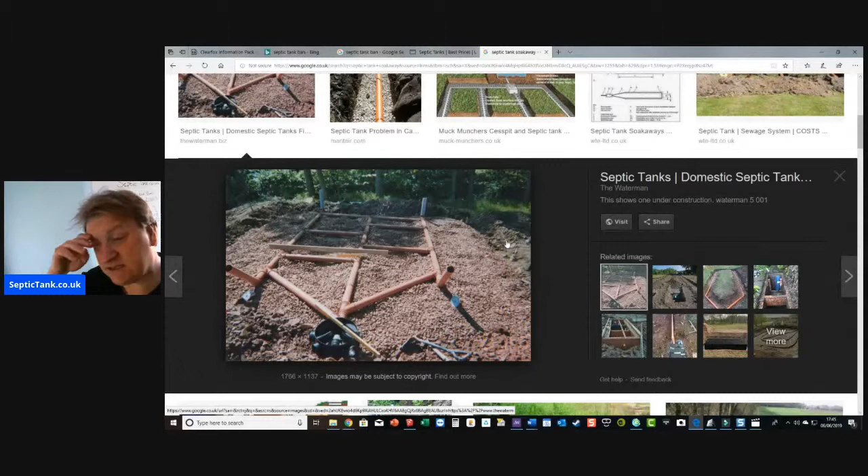So I'm going to go on here and type on Google. There we go. And I'm just going to type in septic tank soakaway. So I'm just going to show you the different types of septic tanks and soakaways on the market today. All right, so let's have a look at one. Here's one. Here's a typical septic tank and soakaway. I call it typical because they're traditional. Tons and tons of shingle, lots of orange pipes.

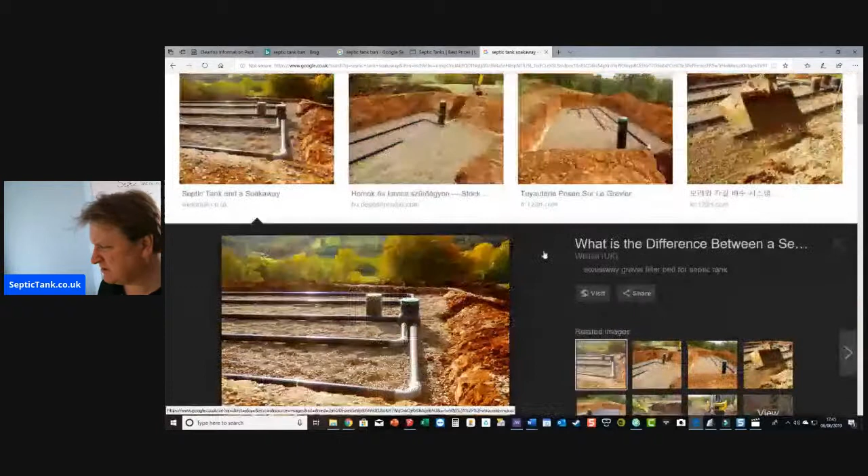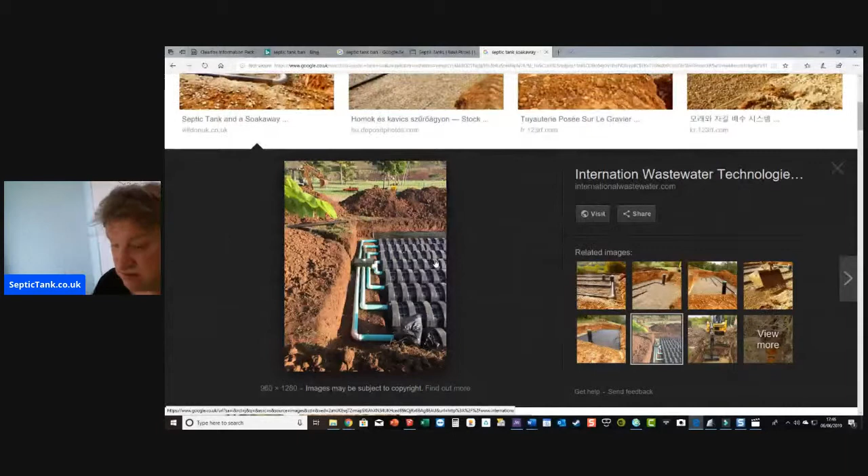Let's give you another one. Let's have a look what else is on here. So again, I don't know who this company is, but you can see tons of pipes there, tons of shingle, tons of excavation. Oh man, here's another one there. All right, here's like a soakaway pit. Can you see they're digging a big pit? It's full of water. What else have we got? There's the same one from a different angle. As I said, it's got like 4 runs of pipes, tons and tons of shingle.

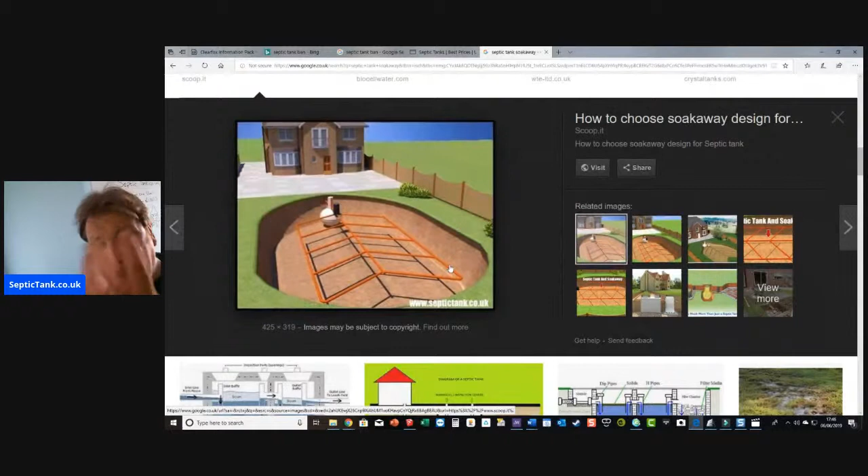Let's see what else we've got here. Now, here's another one. There's one of my pictures. Again, a herringbone type soakaway system.

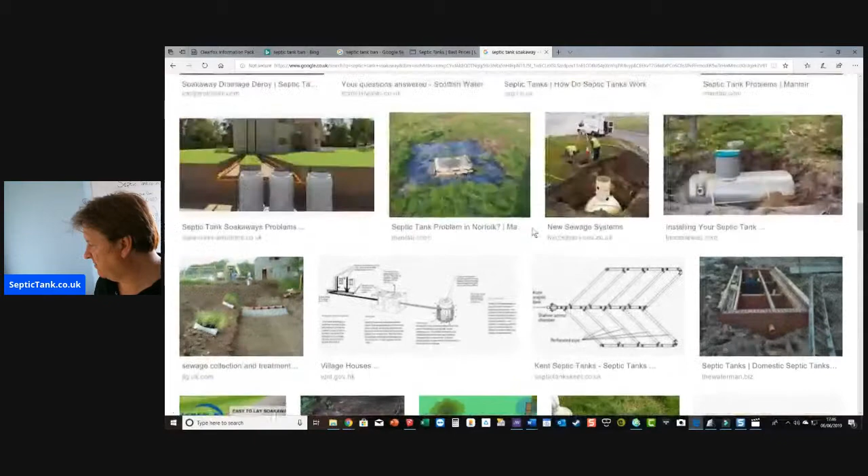What else have we got here? Who's that guy? What's going on there? But anyway, I digress.

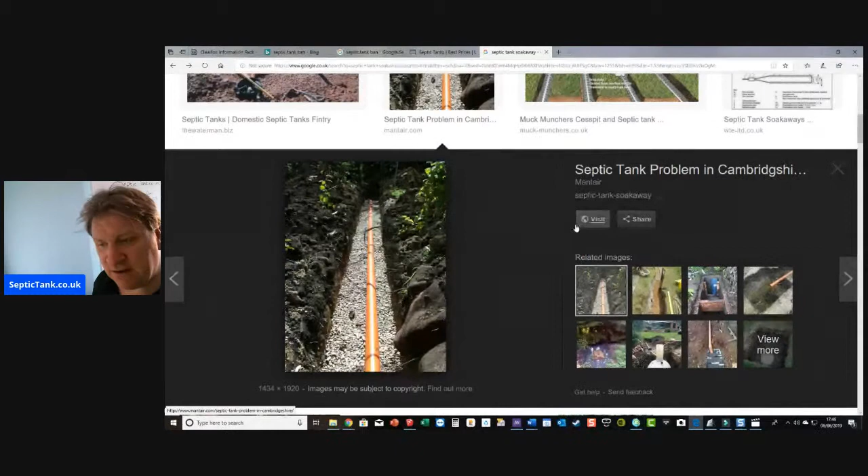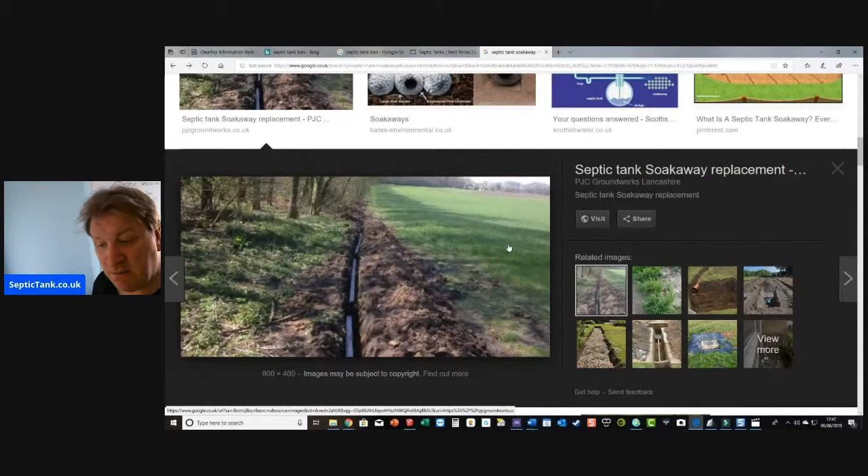So I'm just giving you a broad view. All right, here's another way. Obviously, some pipes, big long spine of orange pipes and shingle there. What else have we got? Man alive. There's another one there. A massive, massive spine going a long, long way. All right, so that one's going into a soakaway pit. But look, you get the point. There's tons of different septic tank and soakaway ideas out there.

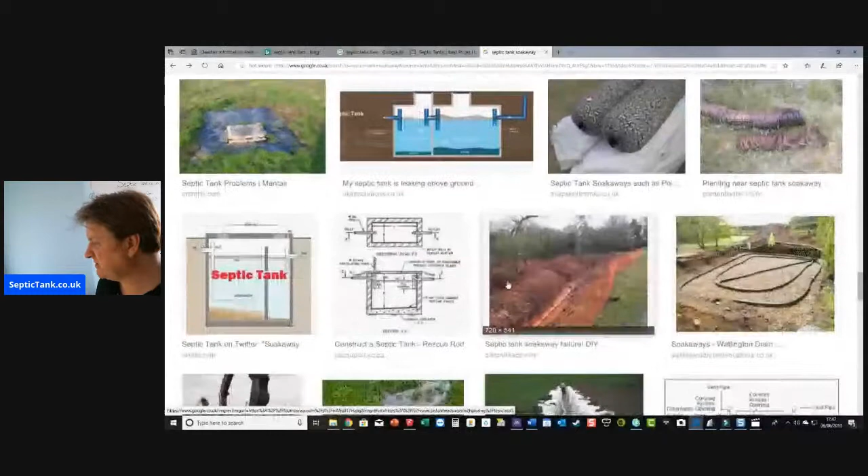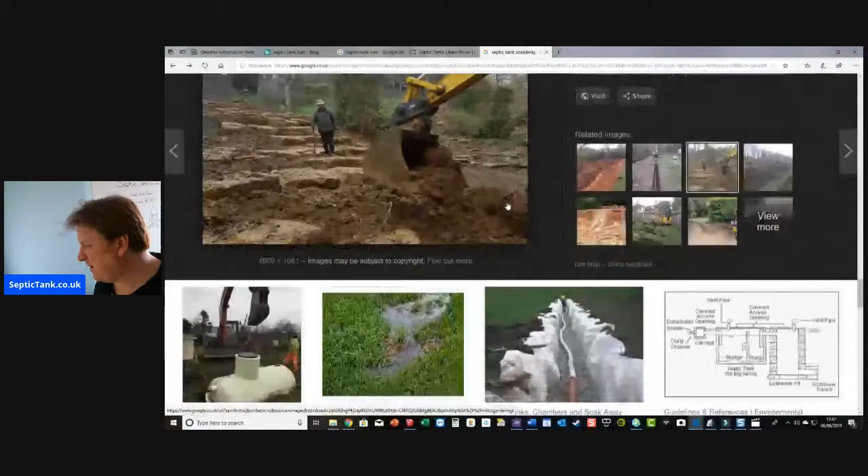You go to loads of different sites. I mean, here's another one, septic tank soakaway failure. Look at the size and the depth of the holes that they've had to dig up here. There's another one. Flipping heck, it's just nuts, man. Just absolutely crazy. A lot of these soakaway designs, soakaway construction, whatever you want to call it.

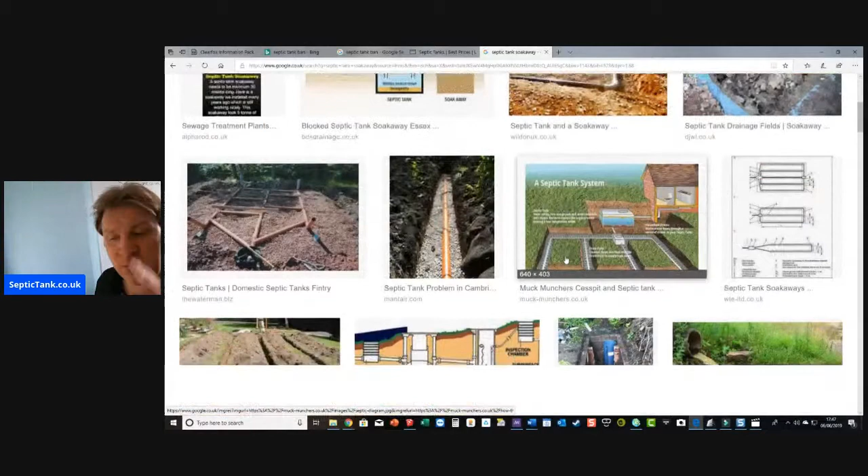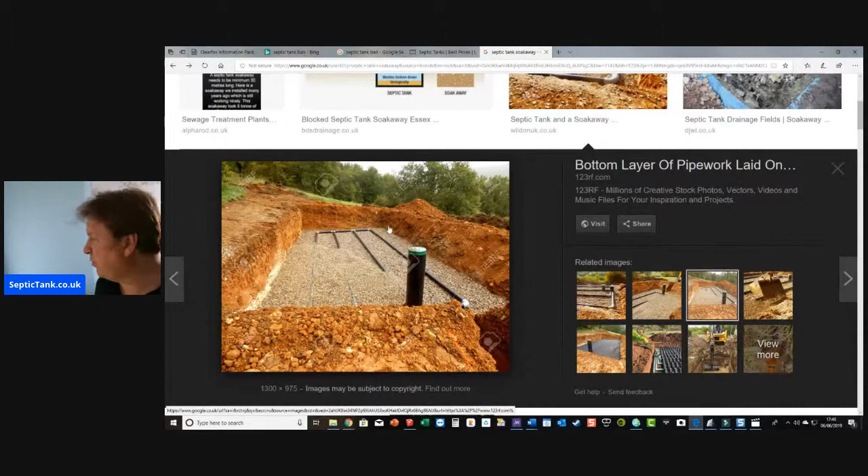But I'm going to show you a really simple and easy way to make and create a septic tank and soakaway that isn't going to cost you thousands and thousands of pounds, right? I'm going to show you a nice, legal, simple way to create your own septic tank and soakaway without having to spend thousands of pounds on shingle and pipes and whatnot. So let me get straight into this, okay?

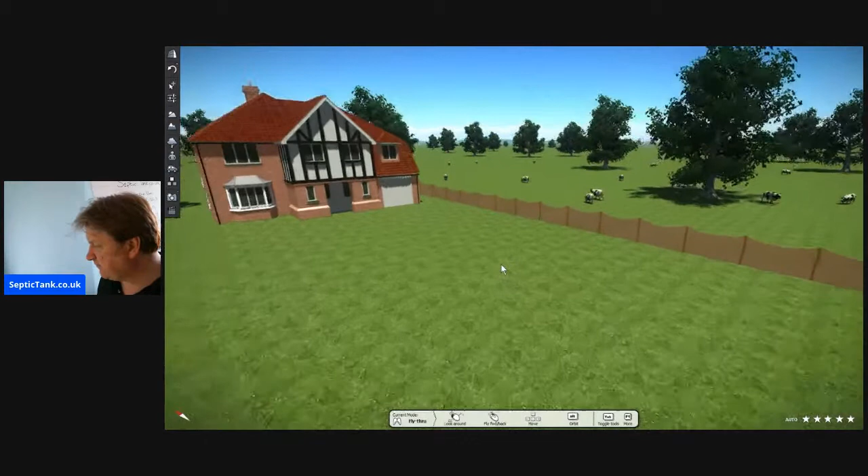So here's a typical house. Let's say this is your property and you've just bought it, and you want to put your own septic tank and soakaway in. Maybe you want to replace the septic tank and soakaway. Let me show you how easy it is to do, and this will save you a lot of money. So the first thing you need to do is locate your soil pipe. Now, most soil pipes are by the side of the house, at the back of the house.

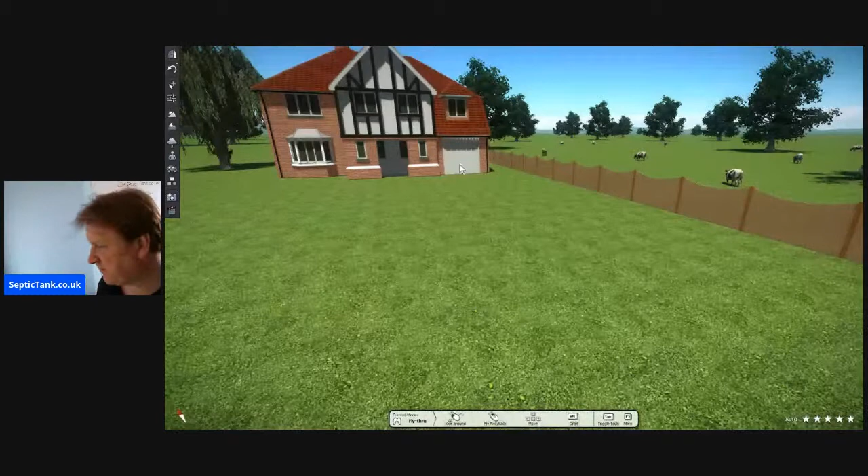But for this instance, for this illustration, let's pretend the soil pipe is at the front of the house. Now, a soil pipe basically is where all the waste goes down and leaves your property. All right. So the first thing we would do is dig a trench. That's pretty simple, isn't it? So we dig a trench from the house where the soil pipe is, just a standard trench.

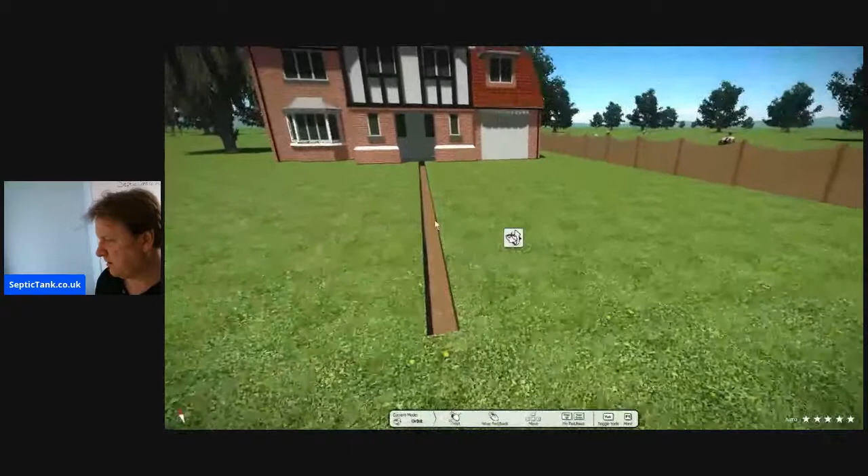Okay. Then, and I really mean this, this is how easy it is. And what I'm going to show you is going to blow your mind. The next thing you need to do is dig a little hole. So you've got your trench from your house and you literally dig a very, very small hole. And this hole here is for the septic tank. Now, notice how shallow it is. You'll get where I'm going with this.

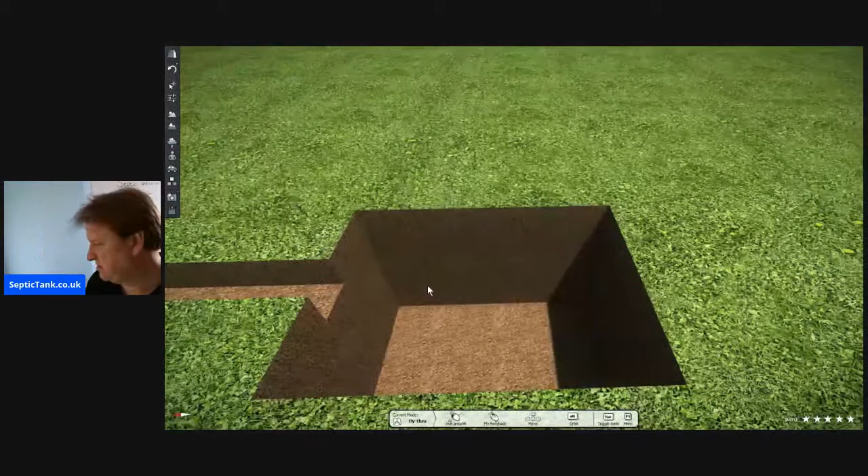So straight away, this has taken you an hour to do so far, okay? It's taken you about an hour to do. Just dig a small little trench and a hole for the septic tank. Then what you do is this.

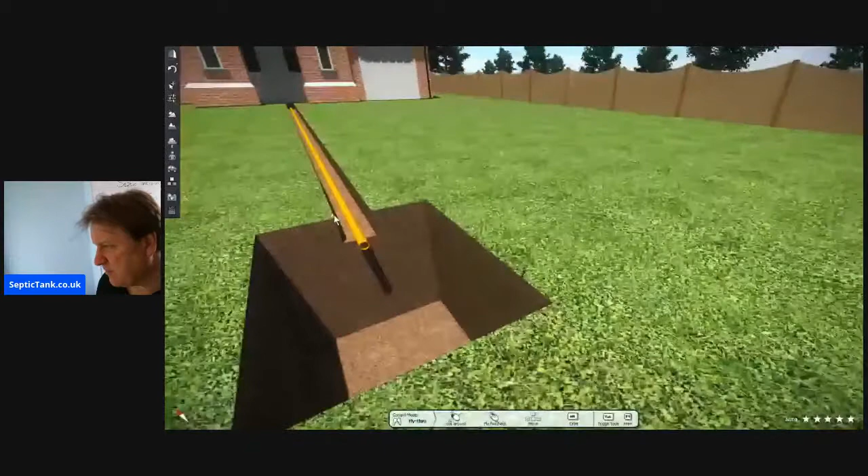You get a standard 4-inch pipe that connects to your soil pipe, and all the waste from your property is going to come down this soil pipe, waste from the kitchen, from the dishwasher, from the washing machine, from the showers, from upstairs, bidets, sinks, baths, everything comes down this pipe, okay? So it travels down that pipe, and then in this hole here, you're going to put your shallow dig septic tank.

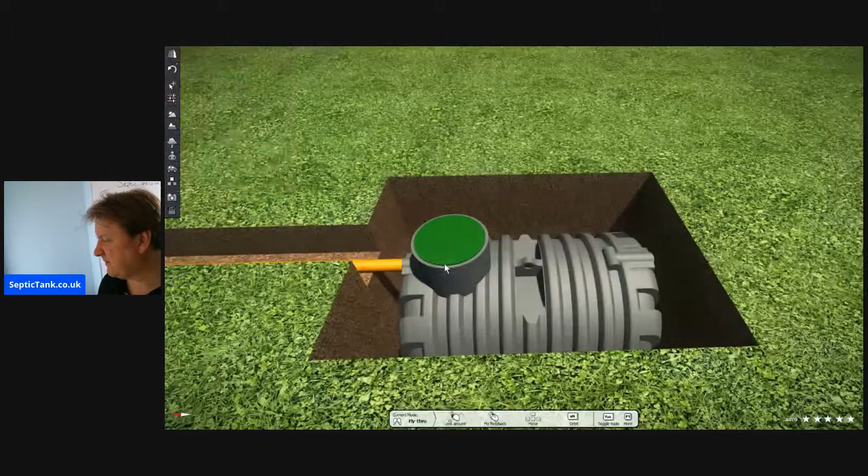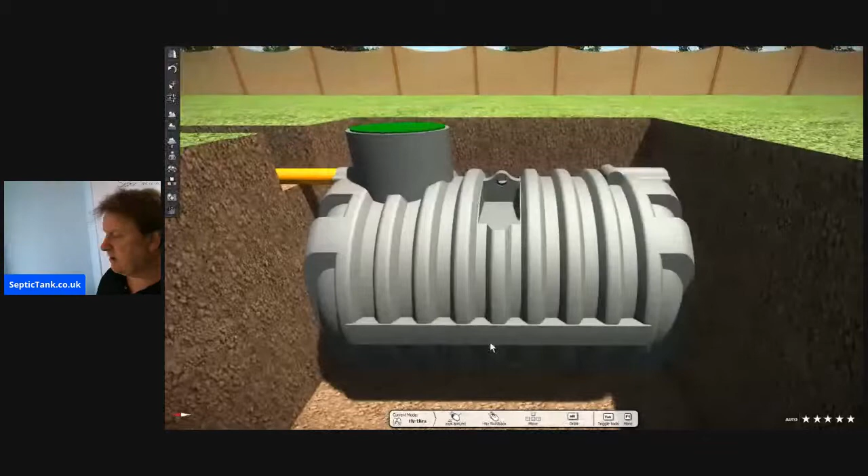So let me just put that in. There you go. There's your septic tank. If I just do a cutaway section here, let me show you this with a bit more clarity. So straight away, that's called a low profile shallow dig septic tank. They're called such because they're very shallow. They don't need concreting. And they literally take about 40 minutes to get in.

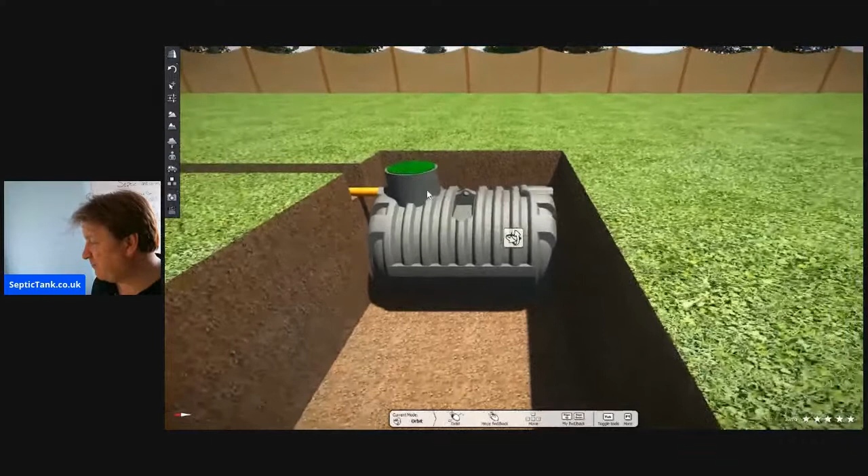So can you see what I've done now? I'll just reiterate. We've dug a trench from there and we've connected the pipe to the septic tank. Now, this is where it gets really simple from here on, because the next thing we need to do now is dig. Oh, we don't want that yet. No, we want...

Oh, my brain is not working today. My brain is not working today. All right, there we go. I got there. It's been a very long day today.

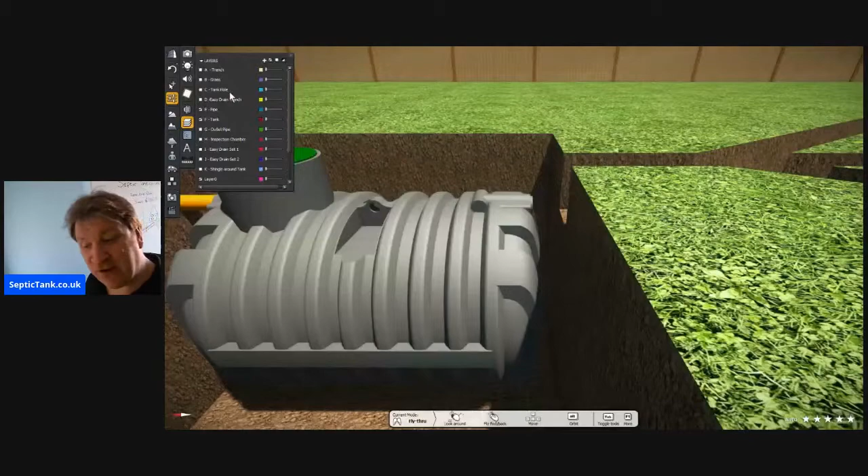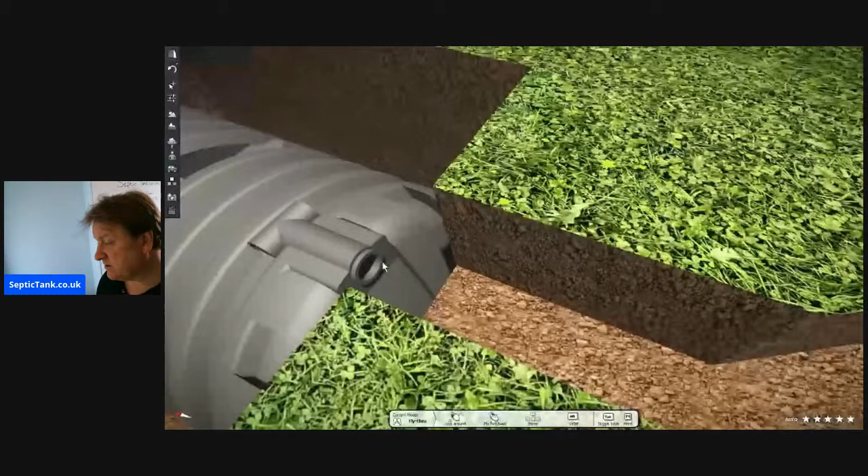Okay. The next thing we need to do is just dig another little trench. Now, you notice that's the outlet pipe on the septic tank there. So all the waste goes in, the tank fills up with liquid, and it's going to come out of this hole here. So all that you do is put a little pipe coming out from the septic tank. Let me show you what it looks like. Just put the grass back on there. There you go. So that's what it looks like.

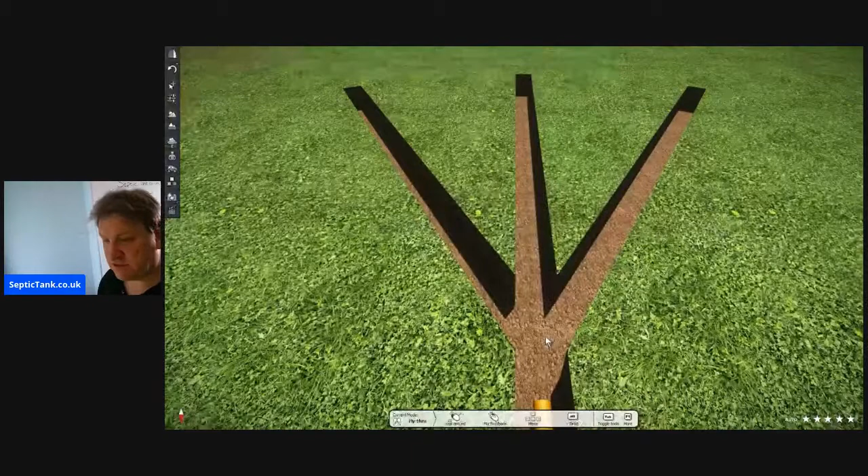So you've got your pipe coming into your tank and you've got your pipe coming out from the tank. That's pretty straightforward so far, isn't it? So let me just zoom this around now for you. And you'll notice here, we've dug 3 little trenches. Just 3 little trenches. If I go a bit higher for you, it almost looks like a duck's foot or a chicken's foot, doesn't it? But this is where it gets amazing, okay?

And this is like space age technology that is available to buy now. And so all that you need to do, once you've done that, is put a German inspection chamber on the outlet pipe. Okay, look at that. So if we go back here, that's the outlet pipe of the septic tank. All the liquid is going to come down here. And this basically is like a distribution chamber. You can see 3 outlets on there, right?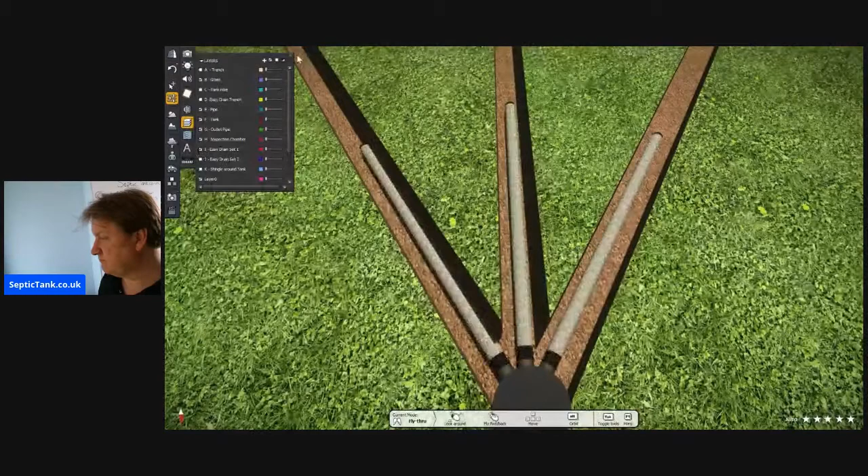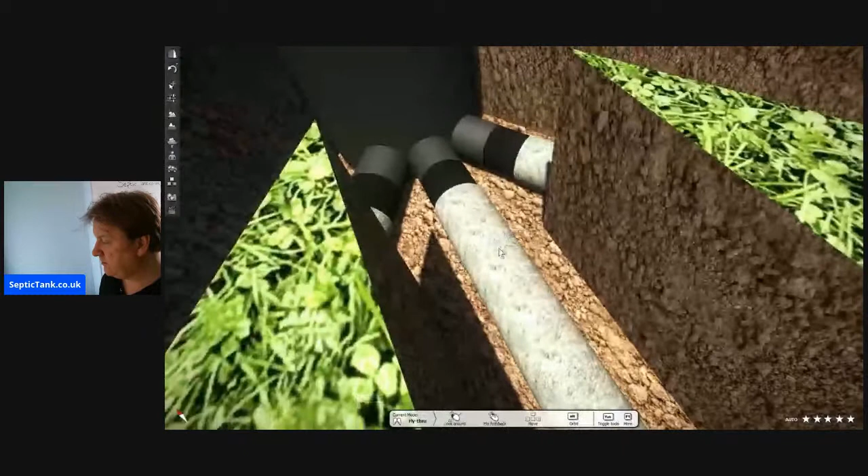All right, they're like fingers. Each finger is about 3 feet in length, and they literally just slot into the outlet pipe on your septic tank there. So let me just turn the brightness down on there a bit. Okay, that was a bit too bright because the sun is shining there. All right, so that's what they look like.

Okay, so there's 3 fingers. Each finger slots into those 3 outlet pipes, and that's what they are. They're gravel-free soakaway pipes. So once you've put the first 3 fingers in, the next thing that you do is put the next set of fingers in. And that is basically it. So let me show you this, right?

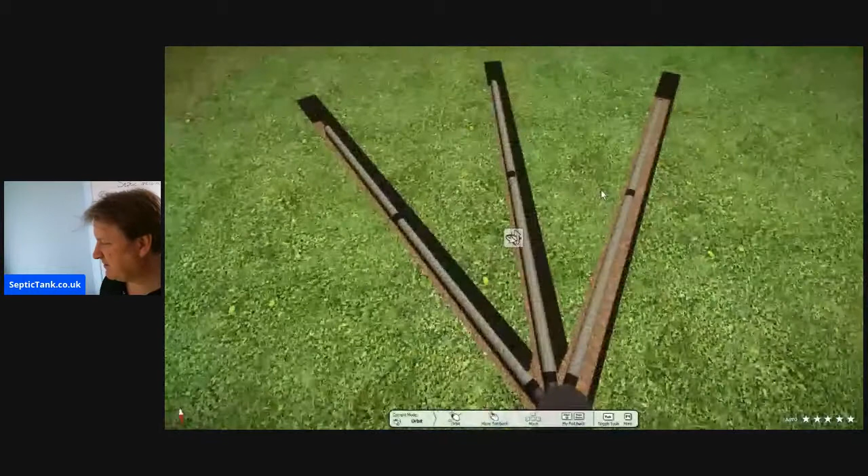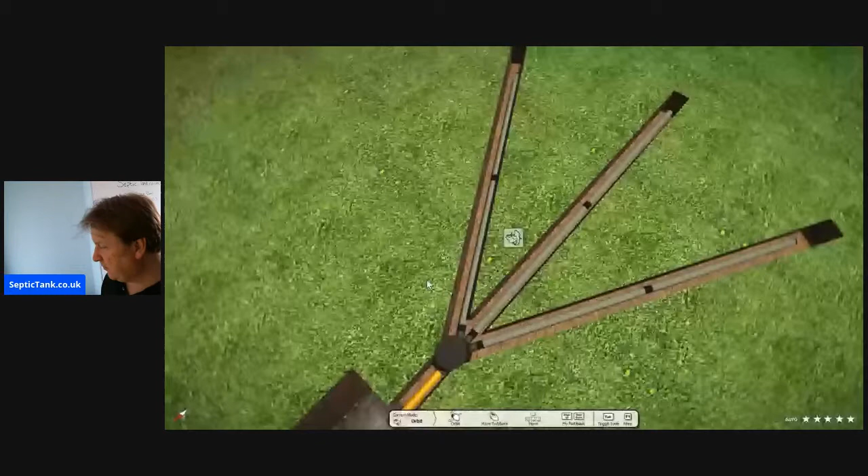I'm showing you these new septic tank soakaway products because they're just revolutionary and they're taking the United Kingdom by storm. This is called Easy Drain Soakaway Kit. So let me just give you a bird's eye view now of what we've done here. So this has taken in all about 3 hours to install an entire septic tank soakaway system. It's unheard of. That's how amazing the new technology is, right?

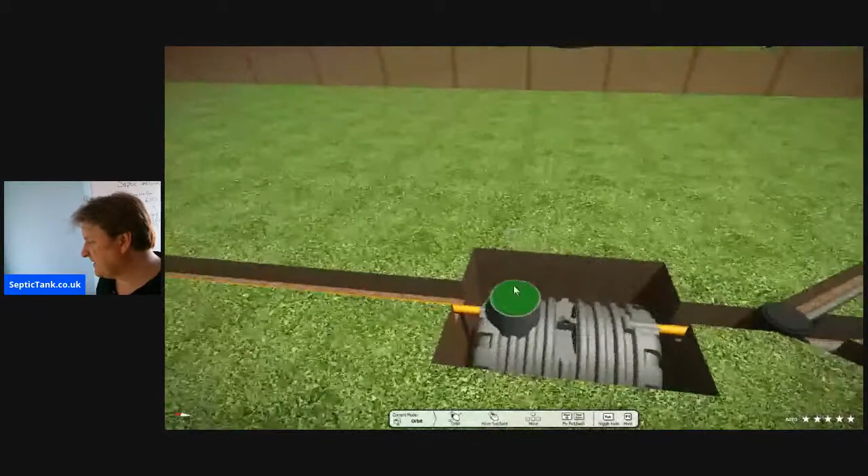So let's just recap what we've done here. If you've never put a septic tank in before, or if you want to get your builder to do it, then he'll love doing this. So let's recap. You dig a trench, you put your pipe in. You put your septic tank in. You put a little orange pipe on the outlet of the septic tank. You put the inspection chamber in, and then you just put your fingers of Easy Drain on there.

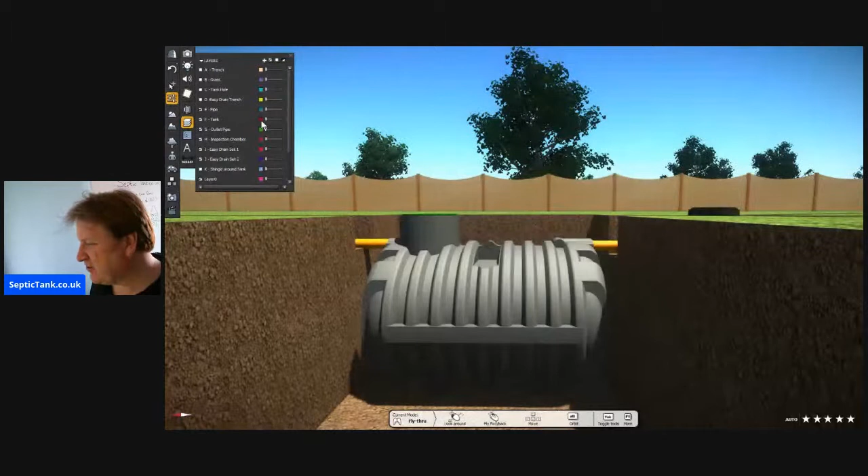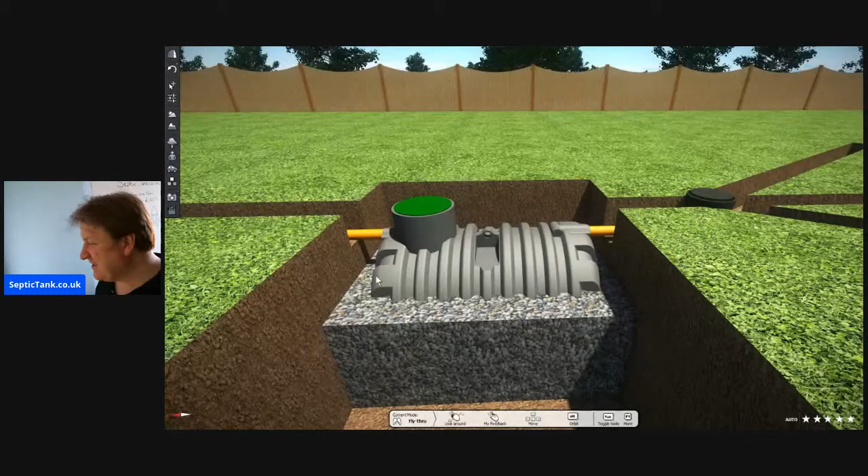All right. And so once you've done that, what do you do then? Well, this is the bit now on the home straight. So let me just take this bit of grass away here. Remember we got our low profile tank. Because they're low profile, they don't need any concreting. So you literally just put some shingle around it like so. Look at that. Ba-da! And then it just gets easier from here.

If you've never put a septic tank in and you fancy getting a digger and doing it yourself, you'll love it. I really tell you, it's so easy to put in; these tanks are unbelievable. So once you've done that, you put the soil over the tank like so. Okay, that's easy, isn't it?

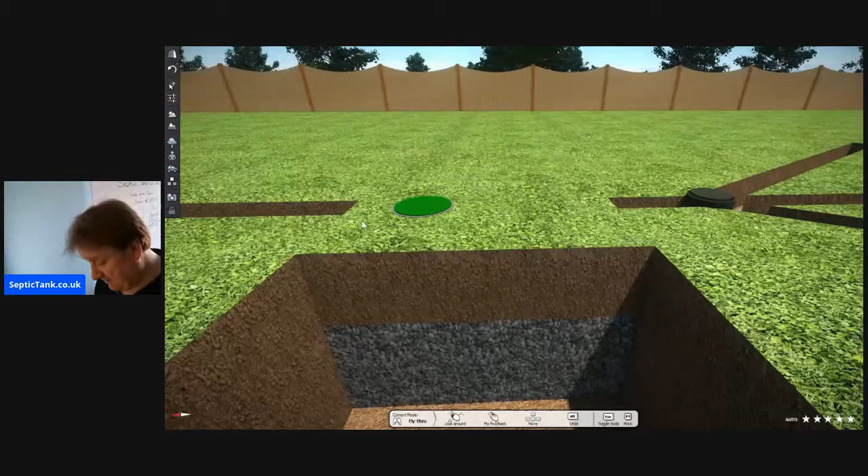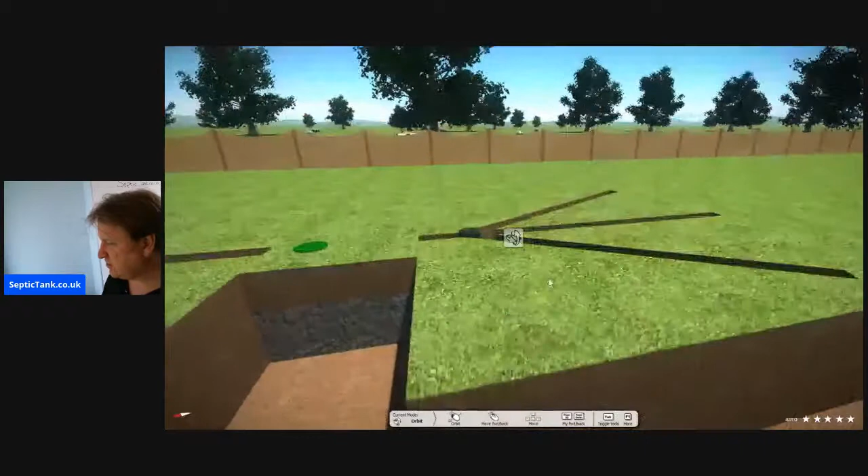What's hard about that? Now going back to the Easy Drain, because it's gravel free... If you're wondering what this hole is here, that was just the cutaway section, so I could show you what it looks like. So don't worry about that. If I put the grass back on, there you go. That's how it looks. So this is how it looks from an aerial view. All right, so you've put the soil over the tank.

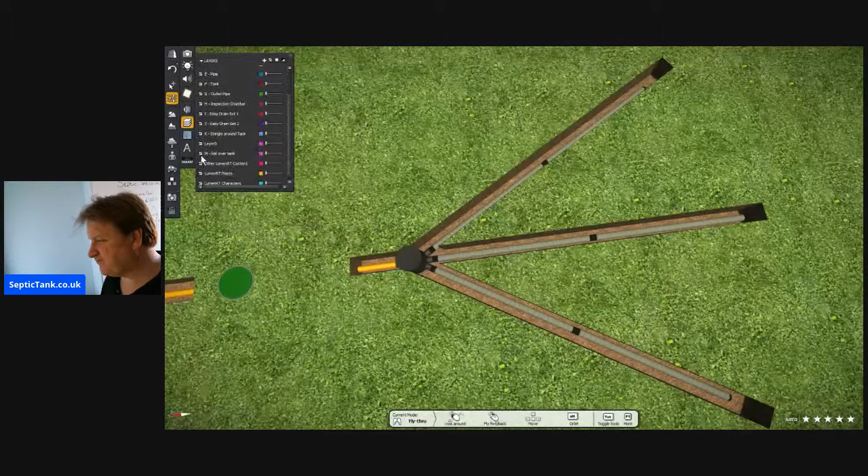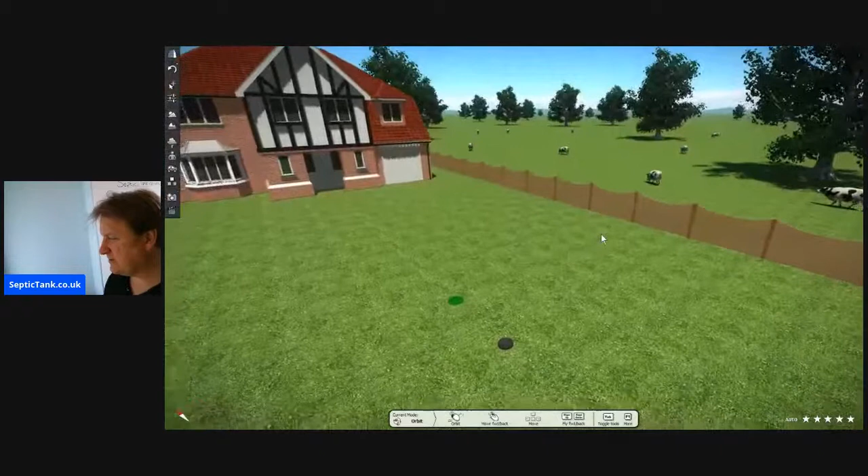What now? Well, you just fill the trenches with the Easy Drain with soil too. Let me show you this. Where is it? There you go. Da-da! You can seed it, you can turf it, just put the turf back. And last but not least, all you do is fill the trench in. And that's how it will look. So you won't even notice it, right? So if I just come out a bit now, that is how to install a modern septic tank and soakaway.

So now you're asking about cost. Well, let me give you the costing here. To put an onion shaped septic tank in, let me just show you what I mean by that. I'm just going back to Google because I'm going to show you a 2,800 litre septic tank. So this is what I mean by an onion tank. Something like that, these big, massive, bulbous tank things. You need a flipping JCB to lift them, but let me just show you what I mean.

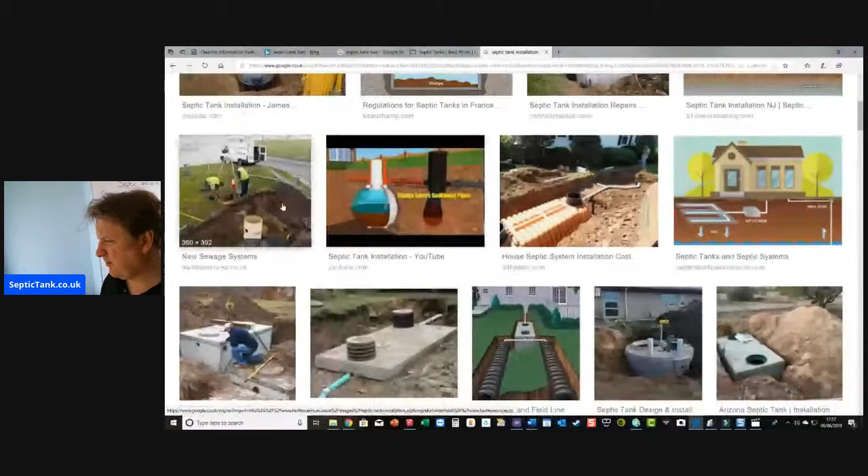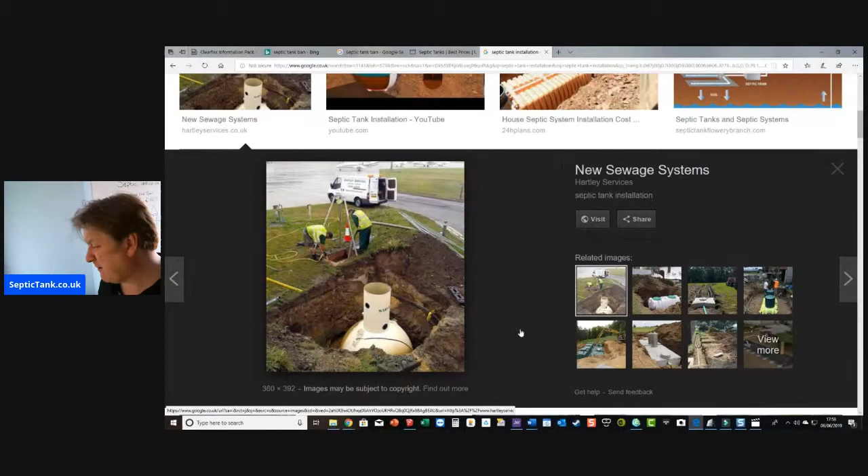So let's see if we can find septic tank installation here. Let me just put that in, just so I can show you. Oh, here's one. Look at the size of the hole. It's nuts why people still put these flaming tanks in, but look at the size of the hole. There's a guy there. These holes are about 12, 13 foot deep. The low profile tanks I was just showing you, they're like 3.5, 4 foot deep. So they're like 10 feet shallower.

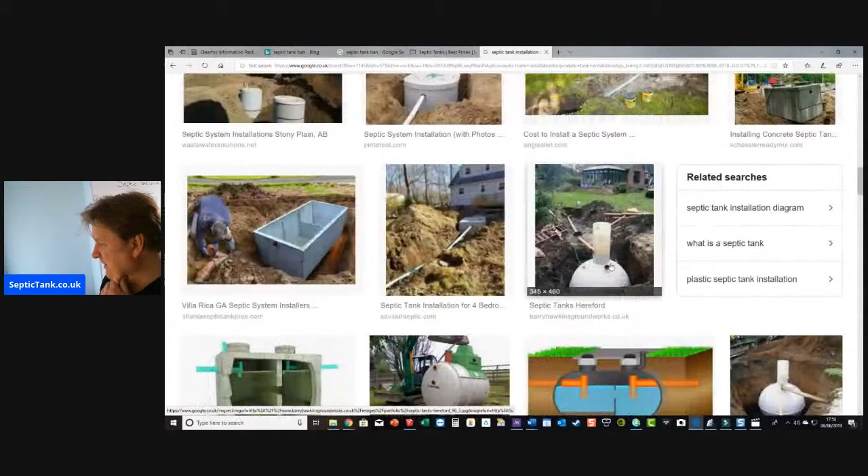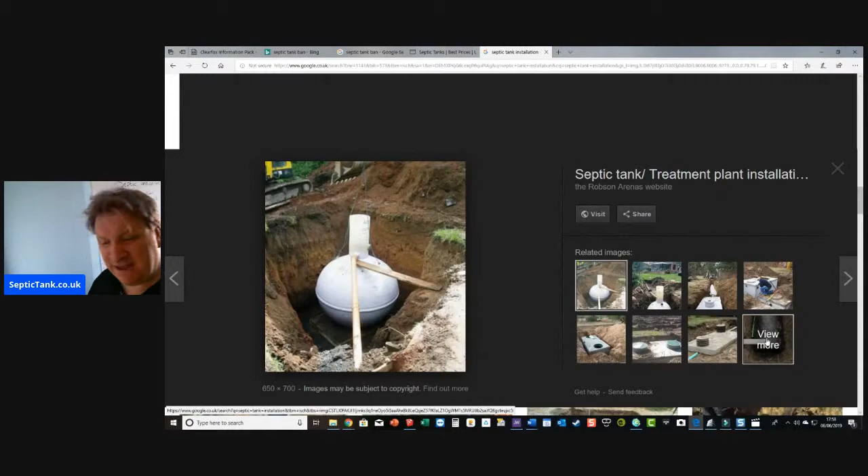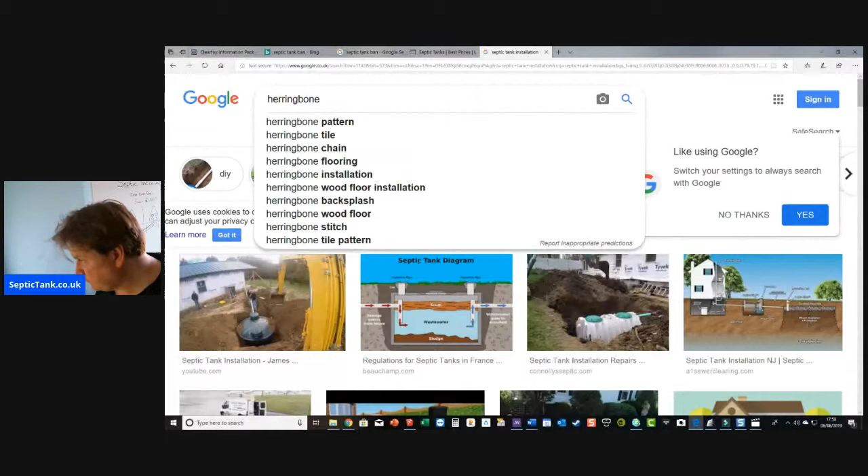And there's another example of an onion-shaped septic tank in the ground. These kind of septic tanks, they're big, look at the hole there, flipping heck. They're just massive holes. So by the time you've put one of these in and you've concreted it, and then you've put a herringbone soakaway system... Let me show you this.

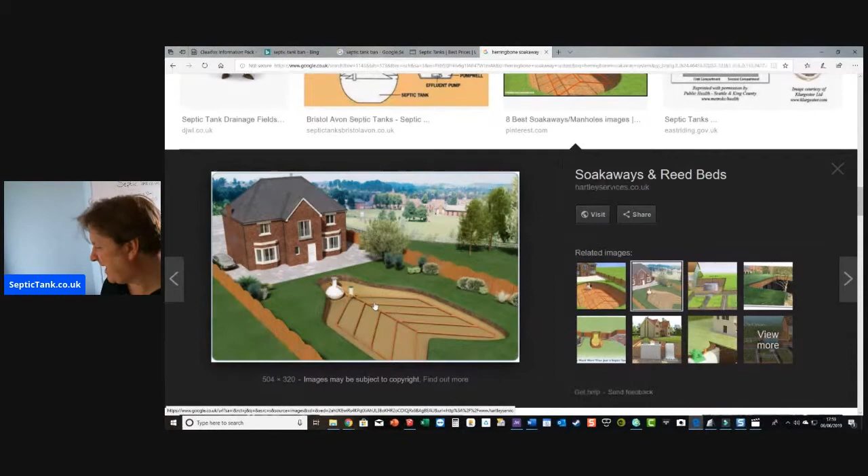Okay, here's a typical one. We saw this one before, didn't we? But look, by the time you've got all your gravel, you're flipping, man alive, you put all your pipes in, you're looking at something like this, like that. That's a typical kind of area. It'll take up a field. They're just nuts to put in, but nevertheless, people put them in. So something like this is going to cost you £3,000, £4,000, £5,000 to put in.

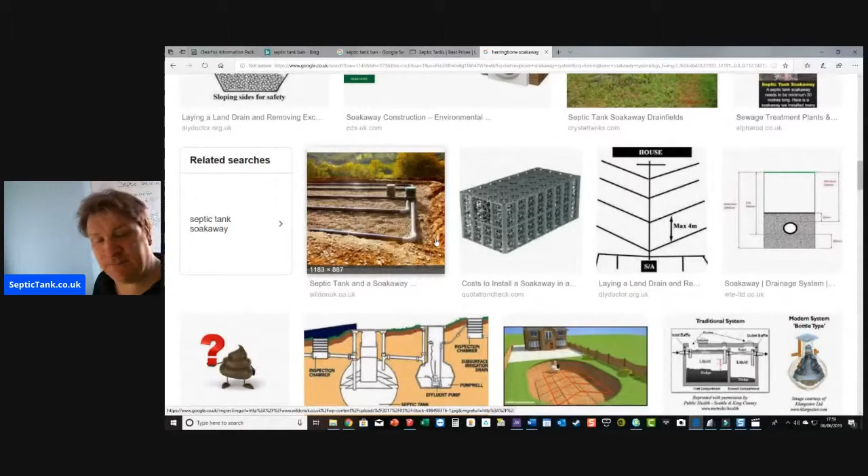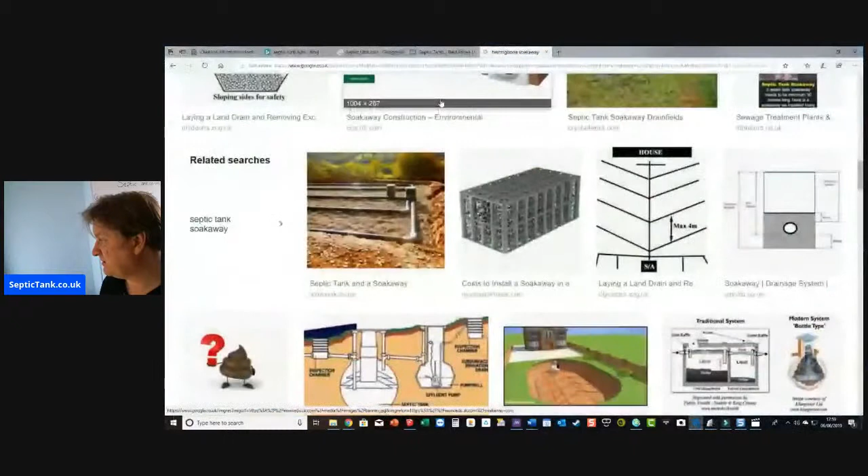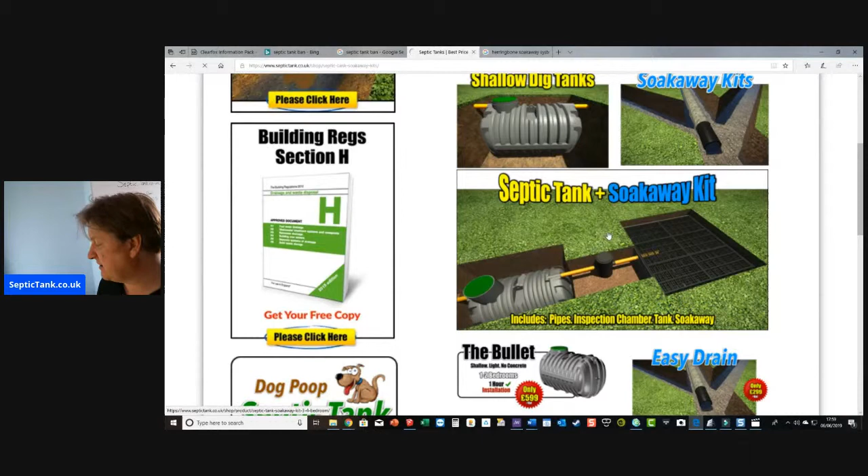All right. So how much is it going to cost you to put the easy drain septic tank system in that I've just shown you how to install? Well, let me show you. All right, let's just cut straight to the chase here. Go to septictank.co.uk. You'll notice there that you can get a septic tank and soakaway kit. You can either get the easy drain or the crates, but either way, let's have a look at a 1 to 2 bedroom property. You're looking at 1499 for a complete septic tank and soakaway kit.

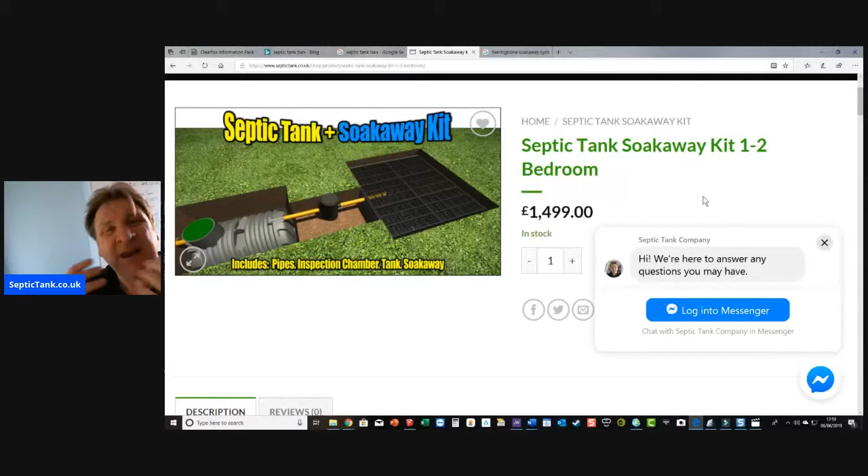They're at least half the price to put in, right? And in the soakaway kits here, you get the pipe work. You get the inspection chamber. You get the low profile septic tank that doesn't need any concreting. You get the crates, or you can get the easy drain. Either doesn't matter. But the point is, these septic tank soakaway kits literally will take you 2 to 3 hours to put in. With the other type of soakaways, you're looking at 2, 3, 4 days, right? Minimum to put in. These are like 3 to 4 hours.

A typical onion tank, concreting it in, flipping massive herringbone system. As I said, you're looking 3, 4, 5,000 quid, which you know yourself. This is 1,499 quid. So they're at least 50, if not 60 to 70% cheaper.

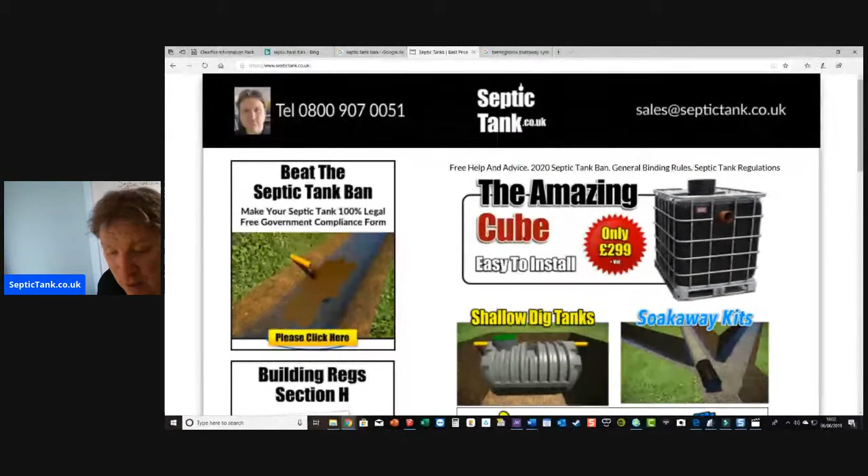And then you can make an informed decision, and hopefully you'll make the right decision. But the point is, you won't have to do a guesstimate anymore. You can actually see the pros and cons of that system over that system and make an informed decision.